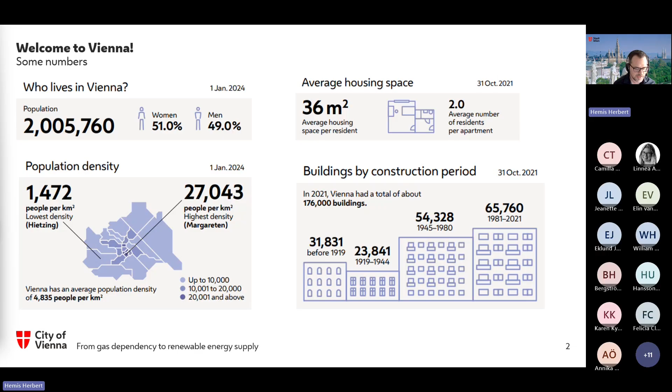Now, what are our strategies and concepts towards decarbonization, towards this energy transition we have to face? Overall, we have this Smart Climate City Strategy, and there is a commitment on political level to follow this strategy. There are the main goals for everyone, and it's compulsory for more or less everyone in the city. So that's our orientation, and under this headline of the Smart Climate City Strategy, we developed some other strategies which go more into detail.

Very important for us was the Vienna Climate Guide. We specified all issues about mitigation and at the same time also adaptation. Now we are working on an extension, a new version of the Vienna Climate Guide. I'm in a working group on this as well, and we are integrating the topic of circularity. But nevertheless, we try to get here the framework.

And when it comes to our heating and cooling supply, we have this phasing out program and strategy, and about the phasing out I will talk a little bit more. Our overall goal was the full decarbonization of all sectors - transport, mobility, waste management, electricity, and finally for the buildings, we want to be more or less climate neutral by 2040.

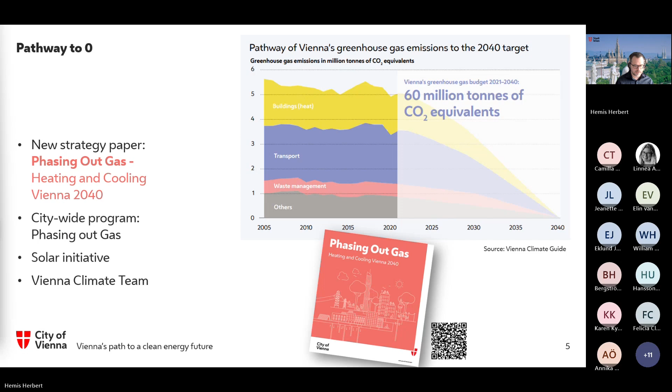A very special challenge we face in Vienna, and I know not many cities have this very special situation - I know it from some Dutch cities, and in some German cities a little bit less - is that in multi-family houses, a lot of apartments have a decentralized gas boiler within the apartment. So not a centralized system, but a decentralized system.

In most cases, if you want to connect the building to district heating, you have to centralize the heating system within the building, which is a very big challenge for us to face. Also it comes to costs. We have more than 500,000 apartments or units we have to change from gas to other energy sources, and that's the very big challenge because you can imagine more than 500,000 apartments - what does that mean? And we have just 13, 14 years left, so we have to do a lot.

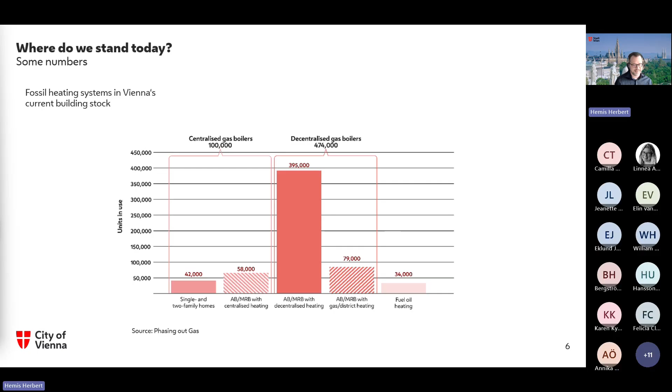For that reason, for instance, we defined decarbonization types of buildings. So we try to figure out what is the situation in the city for the buildings, try to make a typology of it, and get for every type a special strategy.

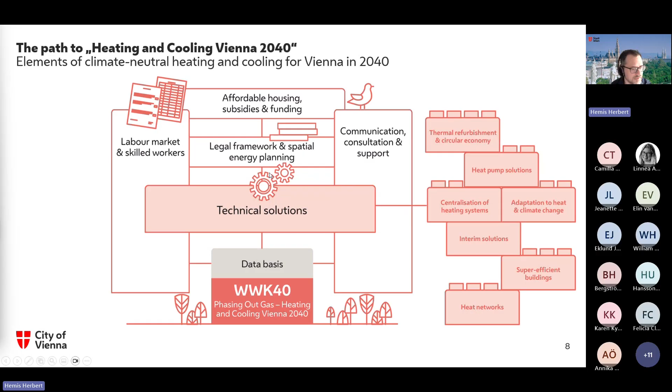At the same time, these are some different fields - we have elements of the phase-out gas program that we face. We are aware that not just a technical solution will be the solution. So we also have the legal framework, and as you can see in the figure, spatial energy planning is just a part of it. Spatial energy planning cannot solve your problem in the energy transition alone - it's just an instrument, a very important one, but nevertheless it has to be connected to all other elements like the labor market, the skilled workers we need, the subsidies, the fundings, the communication and consultation process, and so on, to bring this all together. That's maybe the best option of spatial energy planning - to bring all these issues together on a spatial level.

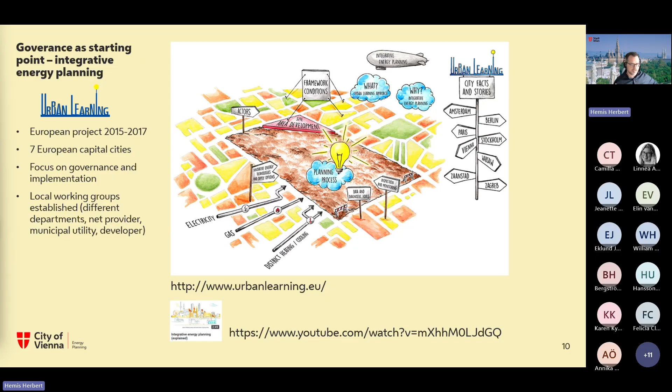When it comes to energy zoning, that might be interesting for you. 10 years ago we made a project called Urban Learning - Stockholm was part of this project - and we were thinking about how, if there is an area development, an urban development ongoing, we could look at the planning processes and integrate energy into them. Because at this time, in most cities energy was only planned building by building, not overall for an area, and sometimes not with renewable energy in mind. That was the reason why. But nevertheless, after making all this analysis of the process and where we can integrate energy, we recognized that the normal spatial planning instruments are not sufficient for the energy transition or for planning it.

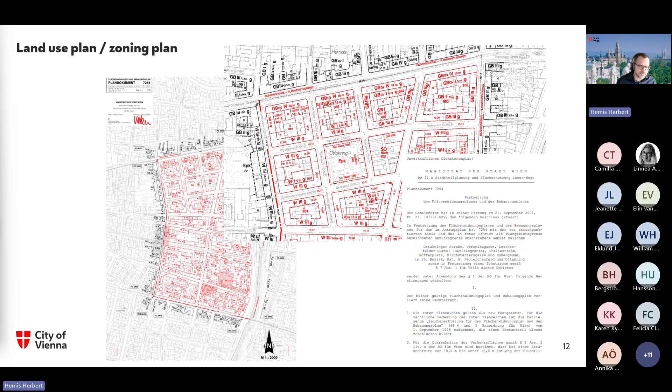And the reason to do this from a planning perspective is different than in energy supply. And energy supply could not be regulated by this. There is also a legal reason why you cannot regulate the open market issue through an urban planning instrument. Yeah, that's the next reason why.

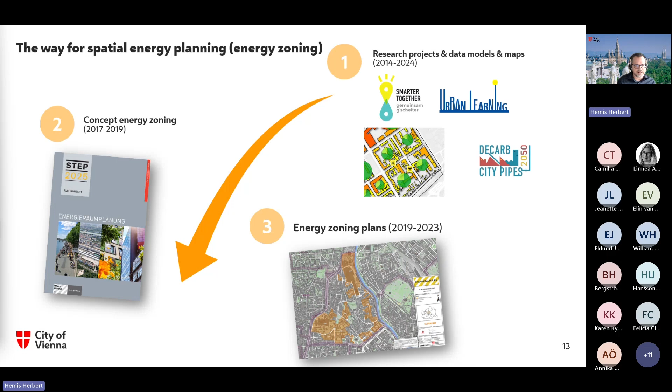Therefore, we were thinking about how to define it. We had this concept of energy zoning, as we call it, to define a little bit what it is and what it is not. And then we had these energy zoning plans where we designate areas where it is not possible to get a gas supply in the case of new buildings. And that was our first step because we still missed a federal law.

And Vienna is also a province, and the province has its own building code and spatial planning act. This is a very special situation in Austria. I know that's not common in other countries in Europe. I know Belgium and a little bit Germany have a similar structure of the provinces and their legal power, but nevertheless, it's very special.

But it was a very good exercise how to do it, and we made a notification to the European Commission of each plan, and we did it by district. And the experience was nice that nobody was complaining about it, and we got this approval and this notification of it. And it was very good for us to get experience.

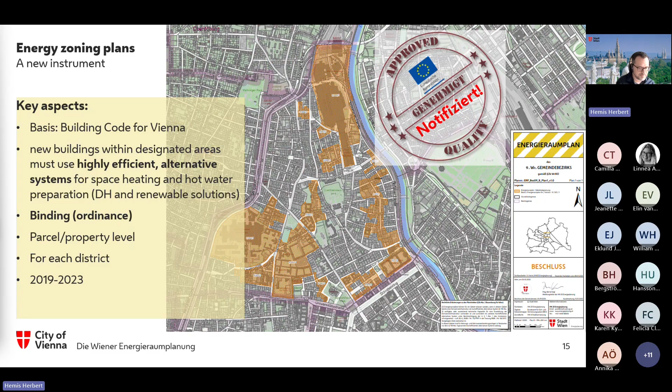But nevertheless, it was not sufficient because we want to transform the building stock if you talk about energy transition. Therefore, we have to go new ways. And the first step for us was the development of the Vienna Heating Plan. First of all, we have this starting point, the Viennese climate guide again, and the concept phase out of gas. And through this concept, we decided that we need an implementation program because it's not sufficient to have just a concept and have almost no idea how to implement it.

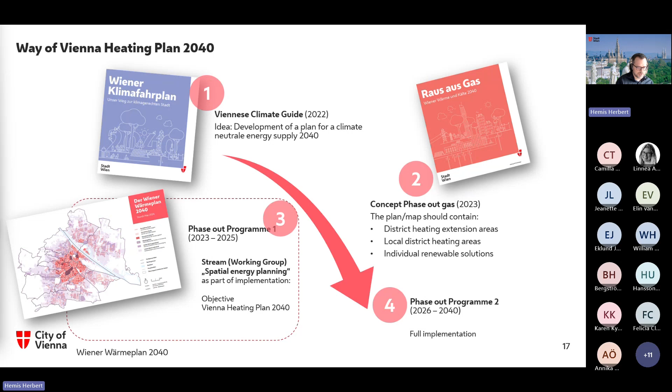And that was the reason why we started with a phase out program three years ago. I will talk a little bit more about it later. And one very important instrument for us was the Vienna Heating Plan to get an idea what we are doing with the building stock. First of all, we have the heat density. Heat density is the most important aspect for whether you need a heating network or not. This was just the first step.

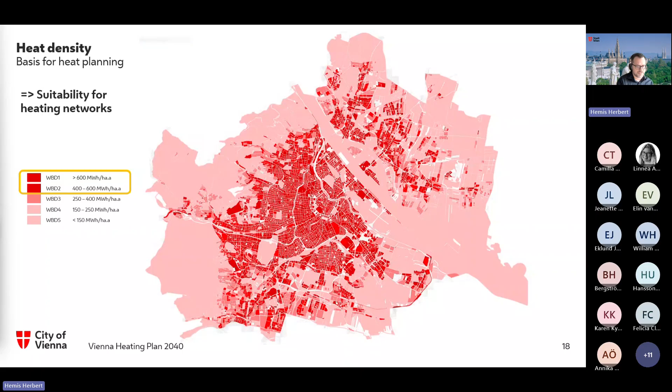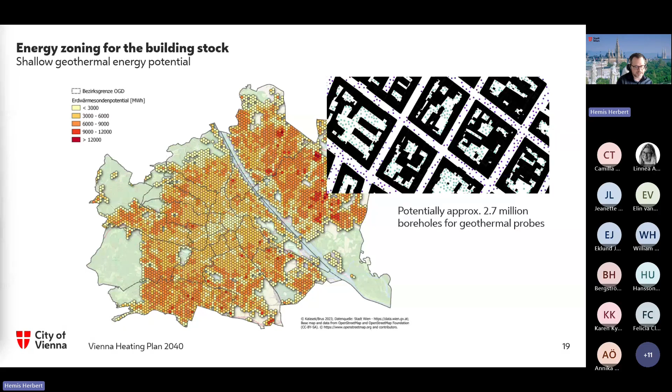For us, as an alternative, we looked at shallow geothermal energy. So we looked where in the city it is possible to get a borehole heat exchanger, where we can drill up to 100 or 200 meters and use it via heat pumps for heating and cooling of the buildings. And the advantage of the systems is that you can do heating and cooling in one system. But it was just a potential analysis, and I will not go too much into detail. Maybe if someone is interested, you can read it later. I will jump over this.

Yeah, and then we looked where the renewable energy potential is sufficient and where not, building block by building block. And as you can see here in the figure, the green areas are where I have more or less sufficient renewable energy potential. We looked now also in detail at the groundwater potential and also the noise issue of the air heat pumps and where it's possible and where not. And then we made an overlay of both.

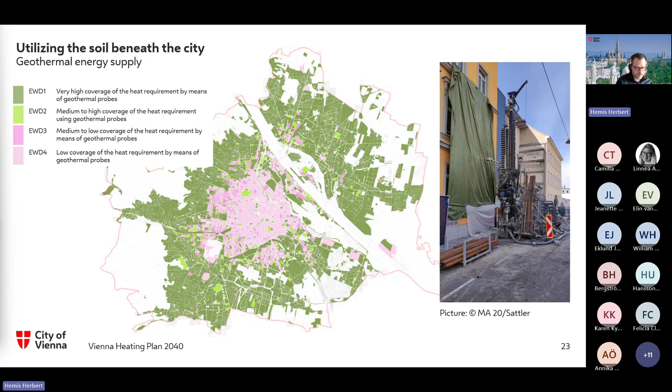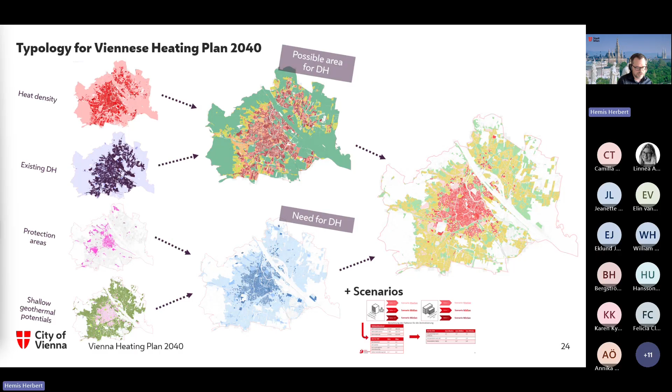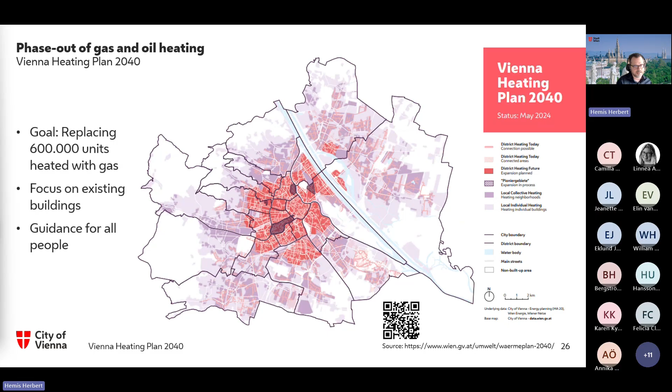And then we try to figure out in which area we really need a district heating network, and in which area we need individual solutions or smaller local heating collectives. Yeah, and finally, this was the result of the Vienna Heating Plan, where we decide in which area district heating should come and in which area not. A little bit more in detail.

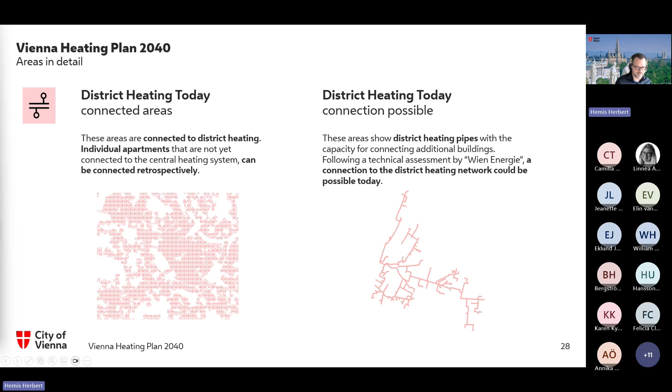So first of all, we defined areas where we want to densify district heating because district heating is already available there, especially buildings which are along the district heating pipe. We have this situation in Vienna that a lot of buildings along the district heating pipe are not connected. And therefore, that's not a sufficient situation, and densification is a first step. But secondly, we need the extension of it, especially in the highly dense built areas where you have no other possibilities.

And very important was for us to figure out which area could be covered by district heating. This is the district heating future zone, we call it. And we figured out 4 pilot areas where the expansion is already done by the energy provider of the city and gives a free offer to everyone to connect to it.

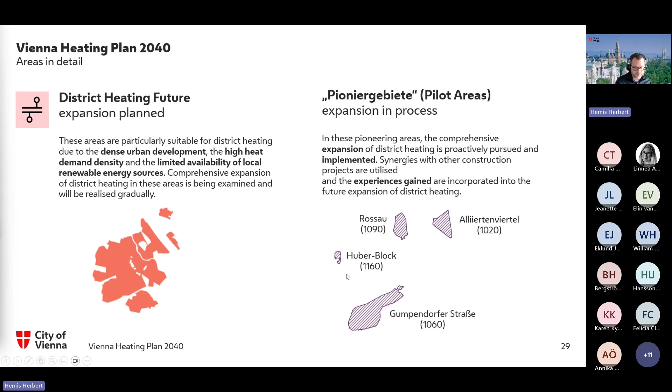But our first experience of that was not so nice because we have no legally binding regulation in Austria that the owners of the building have to change the energy system, have to get out of fossil energy. So there's no legally binding obligation on that. And even though there is very high funding or subsidies, almost nobody cares about it.

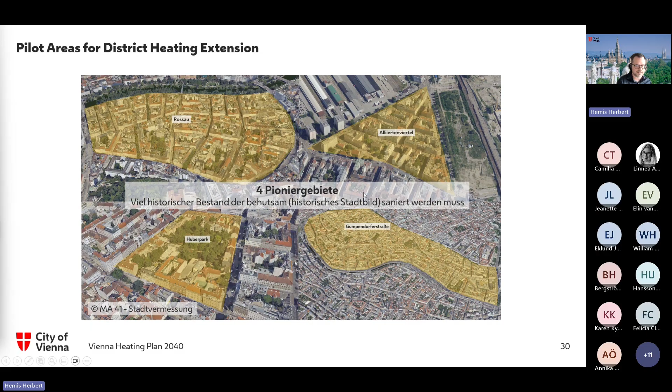So we recognized that the connection rate in the first streets where the district heating was newly built was not so high. For instance, after 2 years in this area, Gumpendorfer Straße, there was a district pipe for more than 50 buildings, and just 17 buildings want to connect to district heating. That's less, it's around a quarter, and that's not very sufficient for us.

Finally, we have other areas, for instance, the local collective heating areas, where we said we need new heating networks because the centralized district heating capacity in terms of renewable energy is limited. And therefore, we need a lot of new ones with different sources, using waste heat, using also shallow geothermal energy, using groundwater and so on. And we recognize that we still need approximately 1,000 of such small heating networks additional to the central district heating network. This will be also a huge challenge.

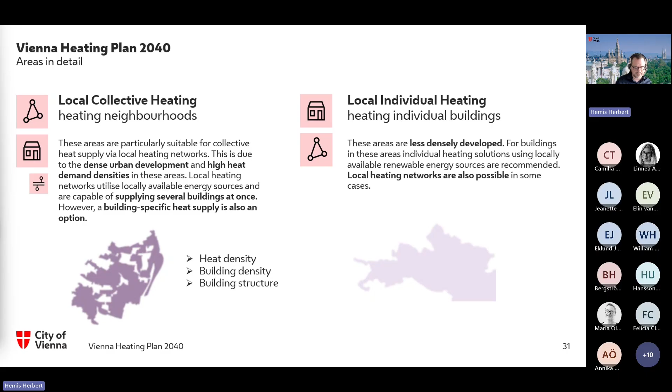And I talk also with other cities about this issue, and they have the same, because in most cities the centralized district heating is limited in capacity. And finally, in all other areas, we say, okay, individual solutions will be the best. But nevertheless, we have to think also about the cooling issue. The cooling demand is rising, and we want to promote solutions which could do both cooling and heating as well.

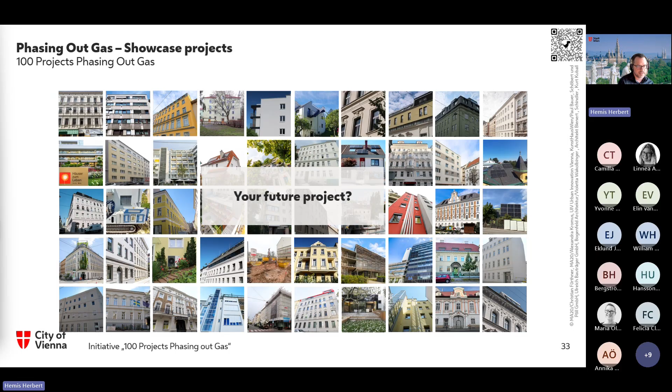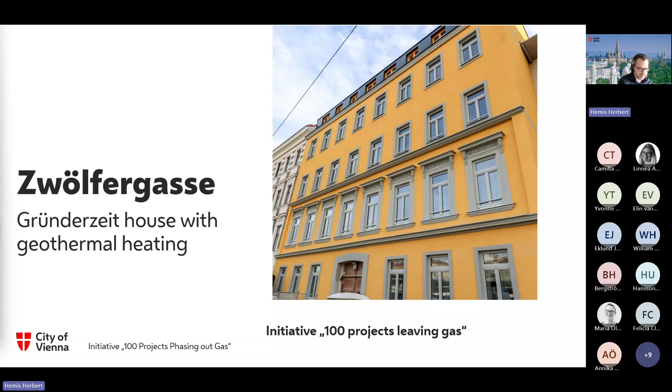Finally, we have also the 100 projects phase out of gas to show what is possible also for old buildings. For instance, you can see here a lot of different types, ages and uses of buildings where we find renewable or decarbonized solutions. But finally, also such an old building, a Gründerzeithaus, is possible. This was refurbished with a floor heating system using borehole heat exchangers, and one or two borehole heat exchangers were drilled in the public space under the sidewalk. And they are fully 100% renewable.

And you see it's possible to do this also in the old building stock, but nevertheless it's not so cheap. And if you have no subsidies on it, nobody will do it. And it will not be the normal one. It's a special project, but it shows what is possible.

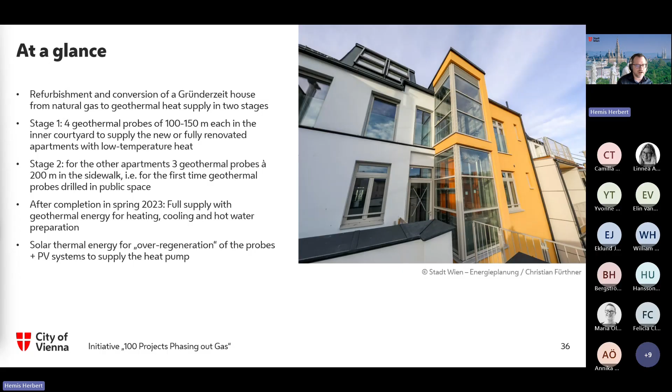Finally, that's my last point. We have this phase out program because spatial energy planning alone, for the whole energy transition, if you talk also about electricity and mobility, will not be sufficient. Therefore, we have this phase out program. We started 3 years ago, and we had different kinds of, we call it streams. So it's a kind of working group working in different depths and different stages. And then we have this overall coordination, and we have regular meetings all together to update each stream on who is working on what.

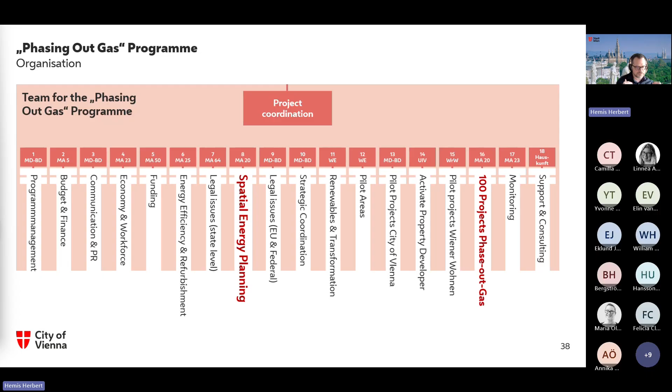And I was leading the spatial energy planning stream of the city. Our department has also the 100 projects. And we were well connected to the legal issues team, to the funding team, to the pilot areas team, and so on. So it's very important that you have this kind of implementation coordination structure in your municipality. Otherwise, it will not work and implementation will not happen. And we are now in phase 2 of the program.

3 years ago, we were thinking that this year we could start with the large scale rollout of our developed solutions. But then some things happened on the federal level, and the fundings were cut. We have this budget restriction, and finally, a very important national law is not coming, which was very important for us. Therefore, we are now reshaping. That's brand new, more or less.

That's my last slide. We try to bring these streams together into clusters. We call it thematic clusters. We have now 3 thematic clusters: planning, building, and activation. Building means that the buildings owned by the city or by the housing associations come forward to be front runners. And secondly, the whole activation issue for owners, for stakeholders, and for the citizens as well. But then finally, we have the planning cluster.

And next week we have the kickoff for this new program. I will lead the planning cluster for the city together with the net provider. And as you can see, I tried to put some words on what we are doing. So we try to connect all these planning issues together in this new cluster.

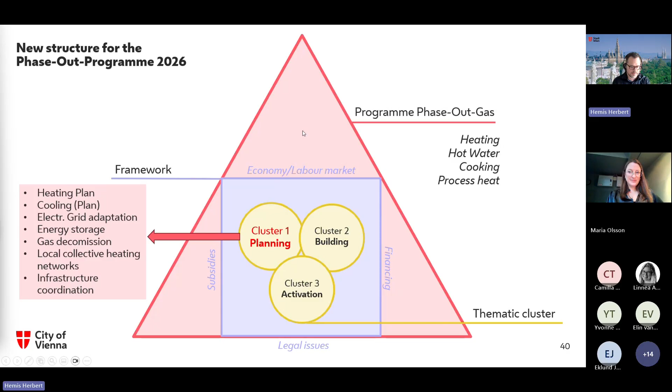I hope that was interesting for you. And now I'm waiting for your questions. Yes, thanks a lot, Herbert. Do you have any questions in the chat? I have a question. I don't know if you can hear me. Can you hear, Herbert? Yes, I can hear you.

If I understood it correctly, you use lots of fossil gas in Vienna, right? Yes, the main fossil source is gas. That's the situation in many European cities. I think in Sweden it's a little bit different. It is, but in the case of Vienna, also German, Dutch, French cities and so on, the most used fossil source is in most cases fossil gas.

The question is, as you already have the infrastructure in your city, have you considered using biogas? In Sweden we are quite good at producing biogas, so you can produce biogas from the waste of the citizens in the city and promote the transition to a more climate friendly solution without doing any big changes in the system. You still have the infrastructure in place, but you change from fossil gas to the more bio-friendly solution.